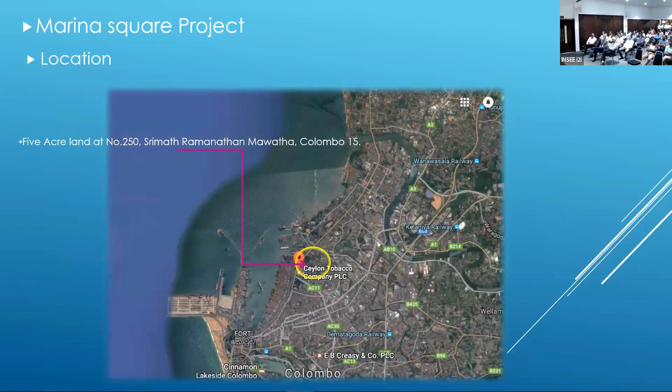1088 luxury apartment units in total, with 1 bedroom, 2 bedroom, 4 bedroom luxury apartment options. 150,000 square feet of commercial spaces, including recreational areas, offices, shops, etc. This is 35-story, 5 building blocks on 5-acre land. You can see the site layout. It's just adjacent to the Ceylon Tobacco Company, nearby the port. This is the close-up of the land. It's like an L block land. You can see the 5-acre land.

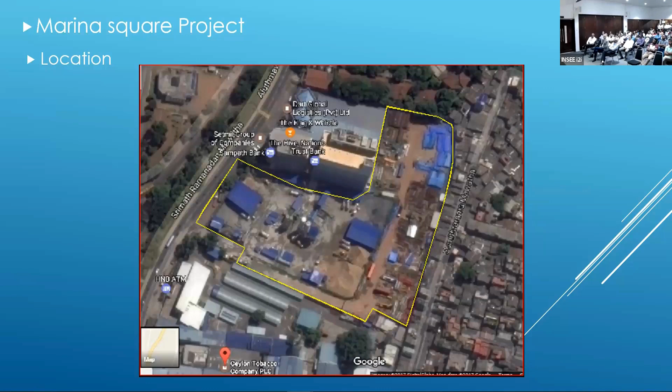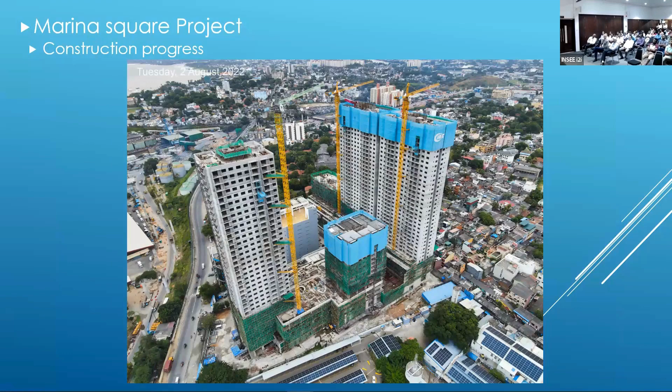This is actually the ongoing construction, the picture in year 2022. And this is 2 months back. Compared to the architectural view, the structure has been completed at this stage. You can see the architectural 3D view is almost equal to the existing structure. You can see on the right-hand side the port elevated road, and also here the port a few 100 meters nearby.

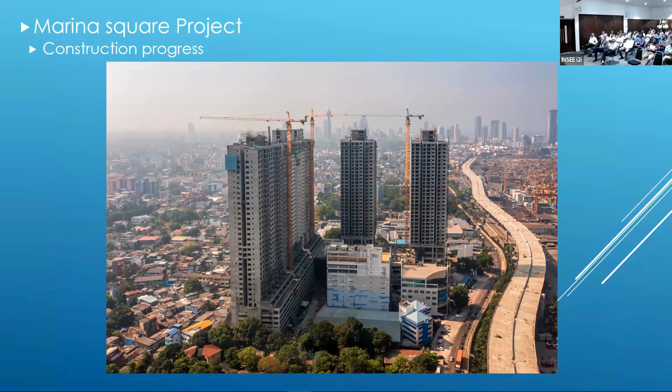So I will move into the challenges phase. When we are considering the challenges of the project, we can divide challenges into 2 parts. One is challenges that have been faced previously, and the other one is challenges new to the project under consideration. In this project, we have faced a lot of challenges, but I have listed out a few of them to give you some understanding of those challenges.

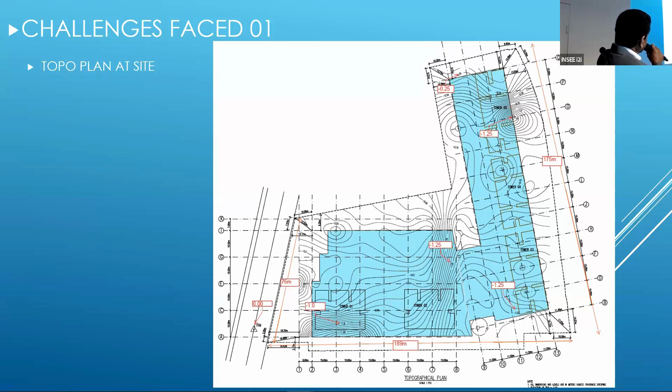First one is the shallow and varying rock depth, because this is 5-acre land. Initially, we observed that the rock depth is very shallow in some areas, very deep in some other areas. So initially, we plotted the topo of land this way. You can see the front road level, if considered 0, the internal ground levels are around 1 meter below the front road line. The length of the site is around 189 meters. Width of the site is 175 meters, as you can see.

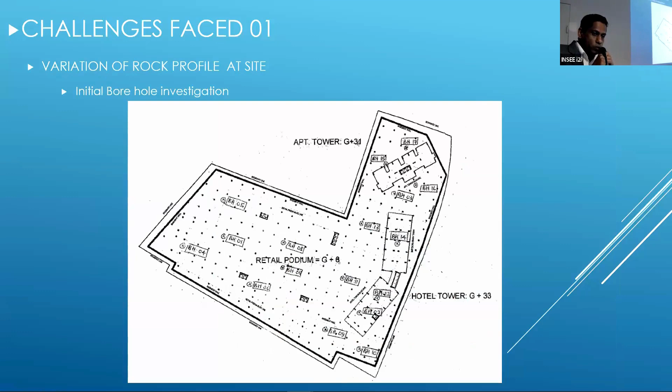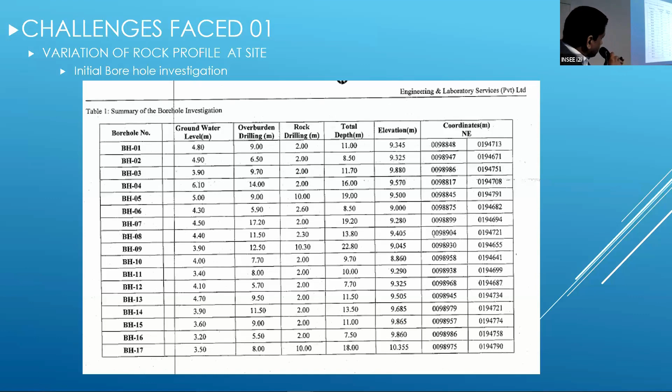So with that detail, we wanted to get more detail of the rock data, the actual rock profile of the site. Because if we did the designs without considering all this information, we would have ended up with a mess at the end of the design, because we wanted to maximize the parking and the basement depth. So therefore, we recorded all data this way, and we obtained all the rock profile data within a 15 meter grid. The whole site we explored on a 15 by 15 meter grid. More than 100 boreholes we performed on this site, in order to get the rock profile of the site, because this is very vital information.

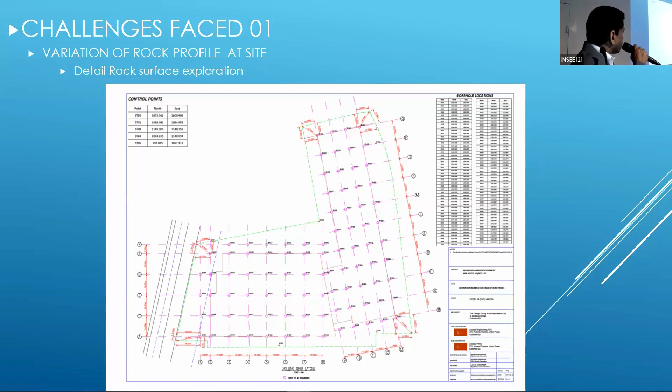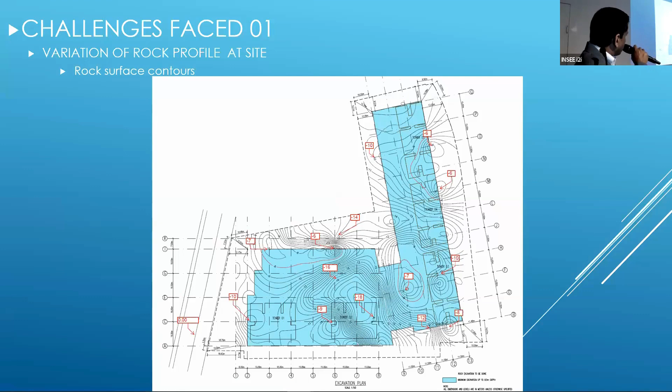Otherwise, if we plan the depth of our basement more than this rock depth, finally it will end up with project issues. So therefore, based on those data, we plotted all the rock profile contours. You can see in front it's around 10 meters, here 7, again 6, and very nearby it's 16 meters. So within 15 meters, we can see a 10 meter difference in the rock. And here also it's 18 and 7 meters. Within just more than 15 meters, we have more than 10 meters rock depth difference.

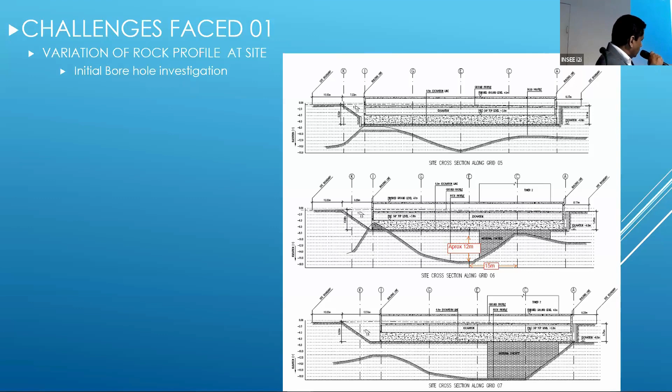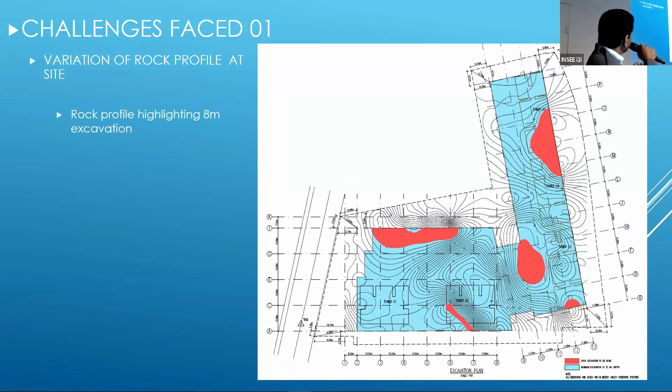So we plotted all this information in the section as well. In the 15 meter distance, we observed approximately a 12 meter difference. The dip angle is 45 degrees, that kind of information we obtained. So therefore, initially we had the idea to go for a deep basement, but if we consider the 8 meter basement with the pile cap depth, the rock excavation would have been done like this red color patch. Another proposal was the 8.5 meter basement depth. If we took that decision, then rock excavation would have been done this way.

If we took this kind of decision, this would lead to a very difficult situation when we go to construction. Without having this information, if we arbitrarily took this decision, we would have ended up with a mess, because in this area the Ceylon Tobacco Company is there, with the set mill and all the other important offices, and in the backside there were a lot of community areas. So therefore, if we plan to do rock excavation, then time, cost, and also environmental issues will come into the picture.

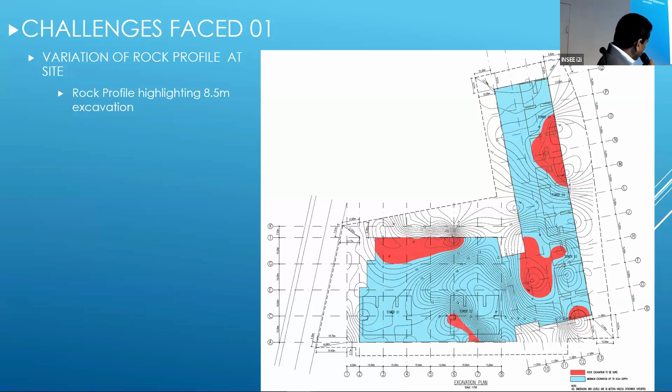So what are the lessons learned here, and what are the decisions we have taken? The information gathered: minimum rock depth in the vicinity is 6 meters, maximum rock depth from the EGL is 18 meters. Basement clear height requirement is 4 meters minimum. The challenges faced because of this situation are issues related to the design, because we can't put our basement as per our requirement, and we need to consider this aspect in our designs. Then rock excavation involvement, and issues related to constructability, vibration, cost, and social issues.

So what are the decisions taken? We suggested a sub-basement, with 2.5 meter excavation from the EGL. Previously I said that the land is around 1 meter below the front road line. Because of this sub-basement, our ground level came up 1.5 meters above the existing ground level, 0.5 meters above the front road line. So this decision was very important, because considering the sewer, the stormwater and all these things, we could manage with this decision.

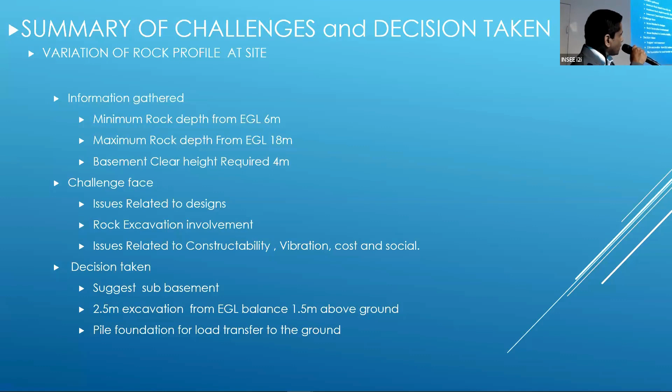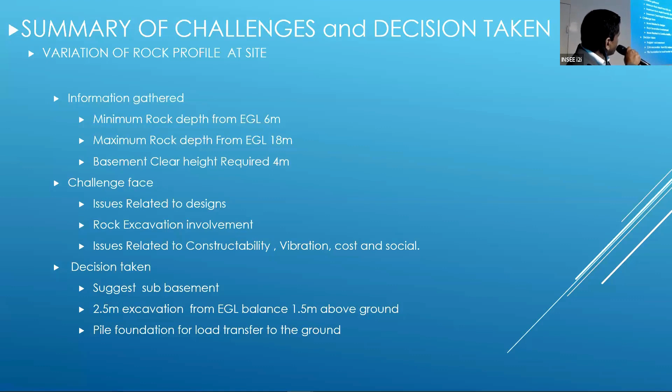In the other area, we need to go for the pile foundation. So therefore, the foundation system is different. In that case, the different behavior of the foundation system, that is also a structural issue, will come into the project. So therefore, with this information and with the challenges faced, this is the decision taken in this issue. So this is the first.

So we'll go to the second challenge faced. In the initial stage, there were two types of architectural design for this building. One is the shear wall structure. The other one is the wall frame structure. I will briefly introduce what are the types of structural form for the high-rise building.

This is what we call rigid frame structure. The column and beam connection with the moment resisting joint is the main structural form in this system. Lateral stiffness by rigid frame action. Generally, when we are talking about the high-rise building, we mainly consider the lateral loads. There is a reason for that, because high-rise and medium-rise buildings we can consider as vertical cantilevers. So the lateral loads are the most important loads which we need to consider in this structural form.

So that's why people are mostly talking about the lateral stability and lateral forces of the high-rise building. The vertical load, anyway, we are designing the elements for the sizing to take care of the vertical load, but for the lateral load, the structure is very vulnerable. So therefore, mainly people are talking about the lateral load when we are considering high-rise and medium-rise buildings. So this is the rigid frame structure, lateral stiffness by rigid frame action.

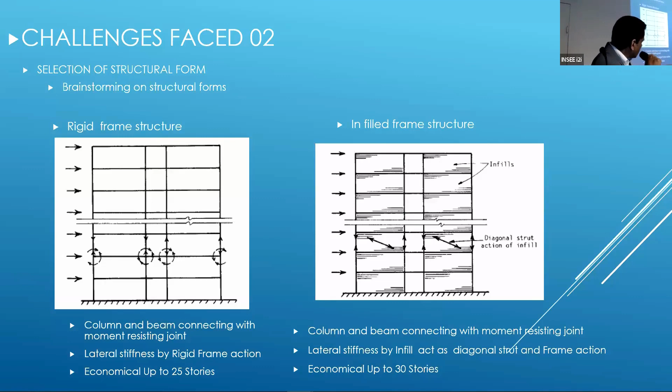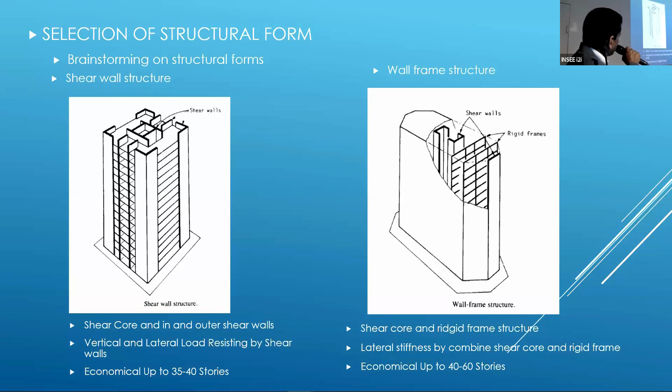This is the wall frame structure. The internal shear walls and the rigid frames are there, the shear core and rigid frame structure. Lateral stiffness by the combined shear core and rigid frame action. This is economical up to 35 to 40 stories. This is 40 to 60 stories.

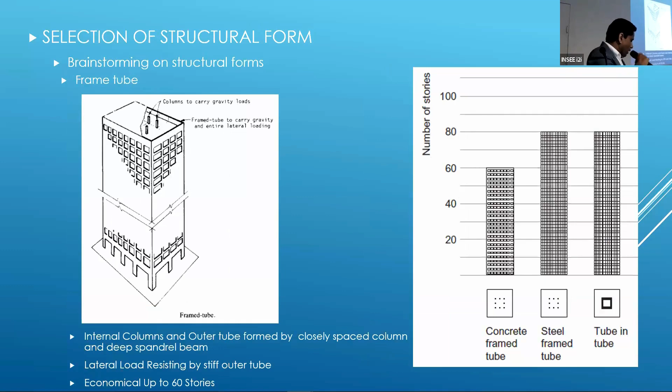So these are some other structural forms, the frame tube structure. You can see with this frame tube structure you can go up to 60 stories, steel frame tube structure 80 stories, and tube in tube structure also you can go for 80 stories. So now I would like to go to the challenges faced and the decisions that we have taken in this case: the structural form.

We have two structural forms given by the architect. One is shear wall structure, and the other one is the wall frame structure. So we selected some criteria to evaluate these two systems. What are the criteria? The structural performance, financial performance, and functional performance. These are the criteria that we have considered to evaluate these two systems.

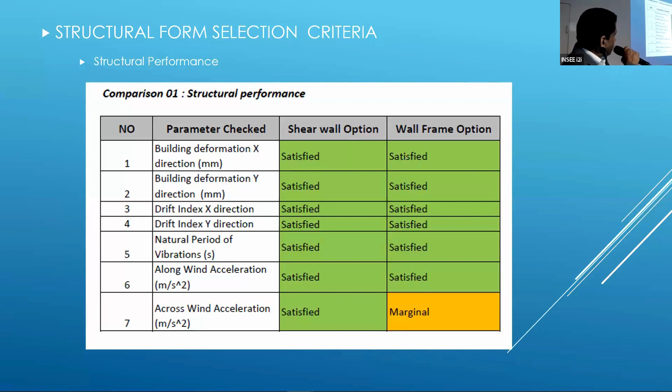In the shear wall option, all these things were satisfied, but in the wall frame option, the crosswind acceleration came to a very marginal point. So we had the opportunity to improve this wall frame option with some modification to the column and the center core. And we also considered the wall frame option as one structural form. So therefore, we evaluated the other aspect as well, functional performance.

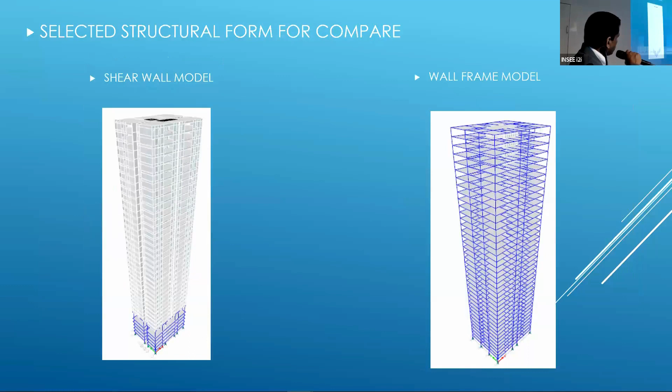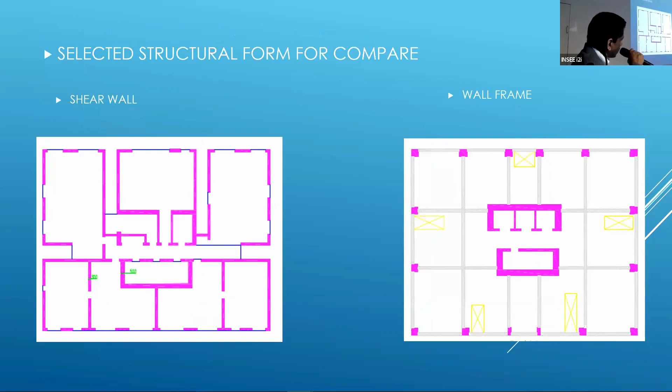What are the parameters checked? Apartment layout flexibility, structural elements visibility and outside view from the inside of the apartment. For apartment layout flexibility, if we consider the wall frame option, I'll go to this wall frame option. We have a big column here, and the set of beams also running here and there. So the apartment layout flexibility is not so good in that option; it's compromised to some extent due to the large column. Here, a flexible layout option is there.

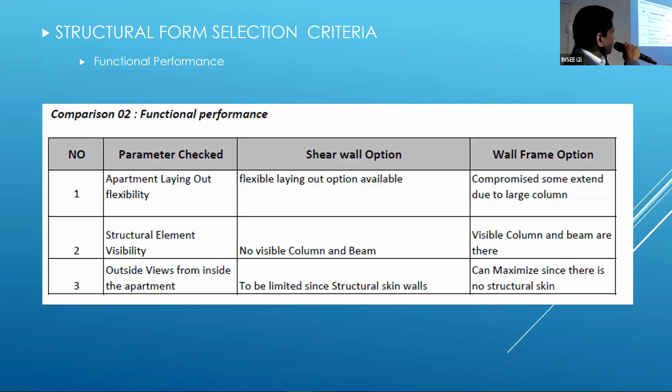Structural element visibility: some visible columns and beams are there. Here, no visible column or beam. And outside view from inside the apartment: because in this shear wall option our outside walls are also load bearing, the lateral load bearing wall system, we can't open those walls as we require, because we need to take some precaution when giving openings for doors and windows. But in this case, it's not an issue. So we can maximize it since there is no structural skin.

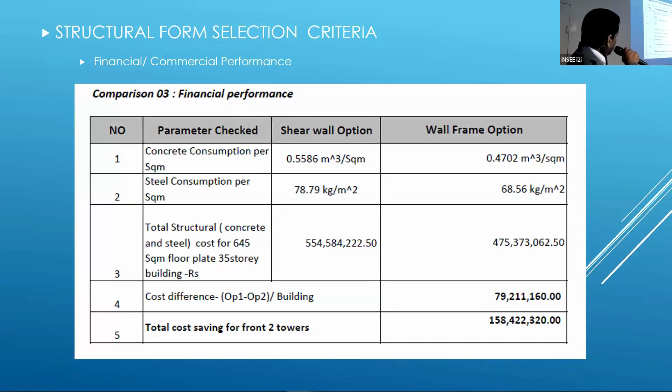Then financial performance. We evaluated the concrete amount that we need to use in these two options. This calculation is actually not applicable to today's context. We did this comparison in 2017 and 2018. This is for two front towers. The structural cost saving for the wall frame option was 158 million. So therefore, we summarize all this information this way.

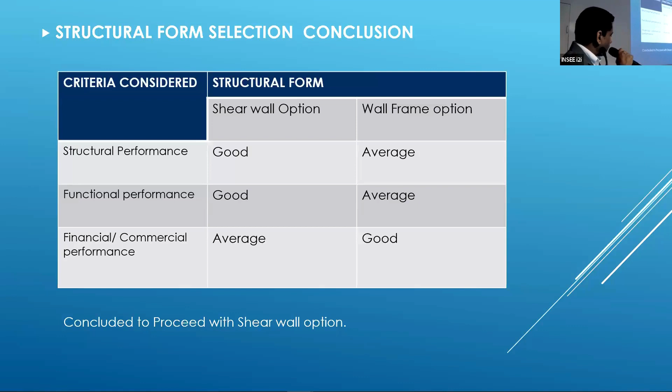The criteria considered are structural performance, functional performance, and financial, commercial performance. Shear wall option, the structural performance is good; the wall frame option is average. Functional performance is good for the shear wall option, but the wall frame option is average. Financial, commercial performance, the shear wall option is average; the wall frame option we need to consider as good, because we have some saving with it. But considering these two good items, we concluded to proceed with the shear wall option in this project. So this is the second challenge we faced, and this is the decision we have taken to move forward.

So next, challenges faced 3. I think Professor Nanayakkara and Dr. Musa will be interested in this aspect, because I have taken some input from Professor Nanayakkara's reports on the challenges faced and the solutions. So what are the challenges faced? Design and construction of the transfer floor, concrete grade selection and minimizing cement content, thermal monitoring, and construction methodology of transfer beams.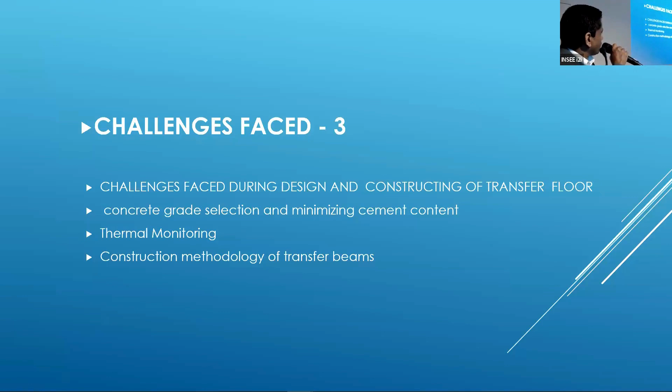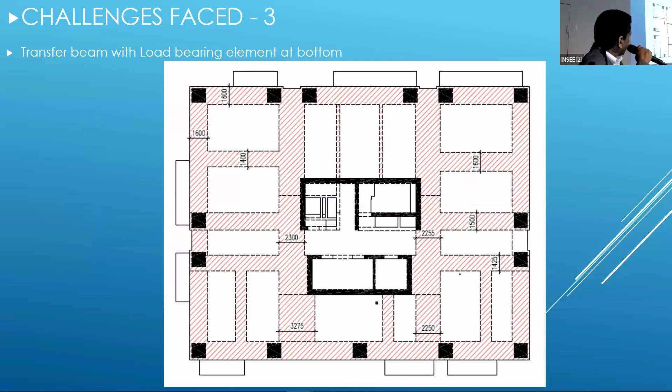So this is the transfer beam layout with the bottom load bearing elements, and this is the transfer beams with the bottom load bearing elements as well as the top shear walls of the tower. This is the typical one tower. The transfer beams that we have considered are 2300 by 3000, 3275 by 2750. Like this, we had a set of transfer beams.

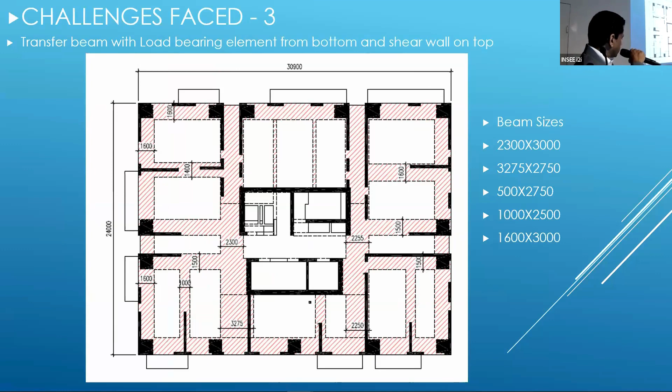So what are the challenges faced and decisions taken? Concrete grade selection and cement content. This is the challenge actually in this transfer beam. Why do we need to reduce the cement? I had a discussion over the last few days with Dr. Musa. His concern was to reduce the paste, because the paste will induce a lot of issues in the concrete. So for the mix design, the design requirement for the transfer beam is grade 50.

Because we were involved with the design and construction consultation of this project, at which level is this concrete grade required? Because we did the analysis of the whole structure, this grade 50 is required for the transfer beam once we construct up to the topmost floor, the penthouse and the water tank, machine room and all these things, and after application of the whole dead load, live load, superimposed dead load and all these loads. Only then do we need this grade 50 concrete for the transfer beam.

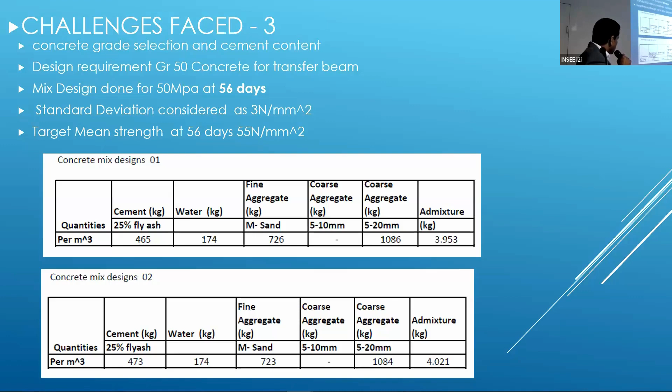Generally what we consider is 28 days strength, but we have taken 50 at 56 days because initially what we need is 35, 40 grade is enough. With this, we were able to reduce some amount of cement content of our mix design. In the INSEE mix design at the i2i center, they gave us a standard deviation of 3 with a very good quality controlling system, and the target mean strength at 56 days considered is 55. So we considered two mix designs like this, with 25% fly ash, 465 cement content and 473 cement content.

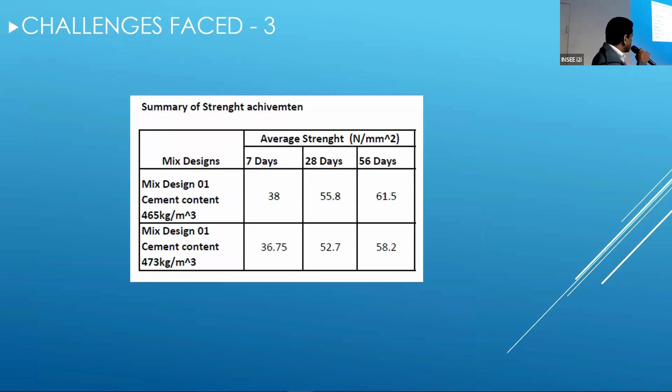What is the strength gain? Mix design 1, at 28 days we obtained 55, and at 56 days we obtained 61. So you can see around 5 to 6 Newton per millimeter square strength gain from 28 to 56 days. So we consider this also as a rational decision to reduce the cement content.

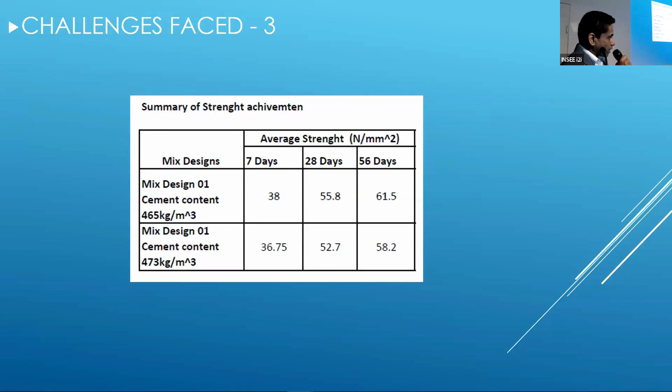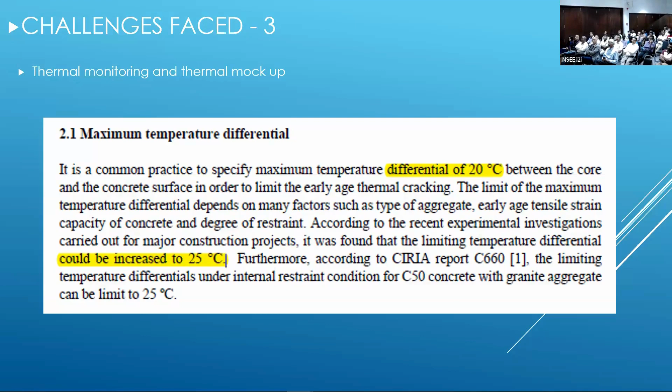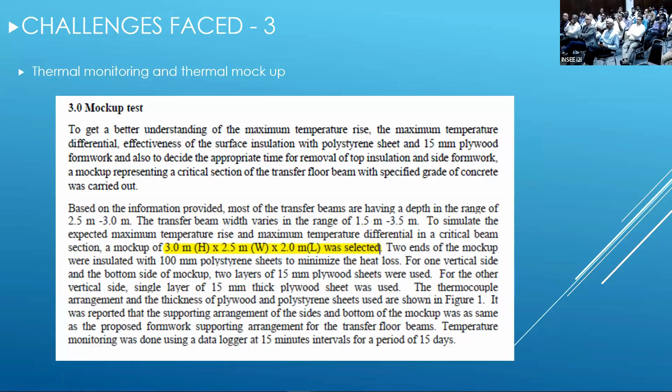So this is one decision that we have taken, and this is actually an extraction from Professor Nanayakkara's recommendation regarding the thermal mock-up, because we performed thermal mock-ups for these two mix designs. We performed two mock-ups, one a computer simulation mock-up, the other a physical mock-up. With this mix design, the differential core to side surface temperature difference, which generally we consider as 20 degrees, could be increased to 25 degrees, and the core temperature could be increased to 75 degrees. So with that, the professor recommended doing a 3 by 2.5 by 2 meter mock-up.

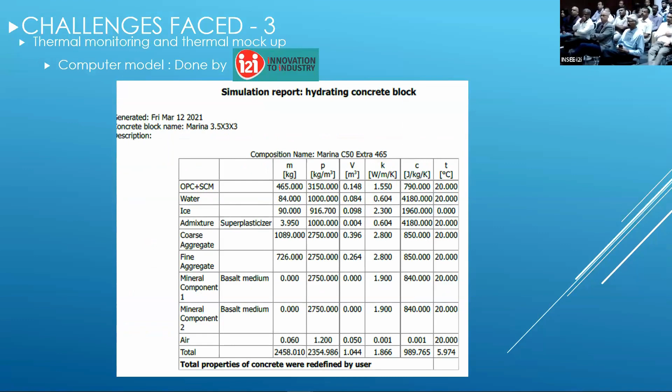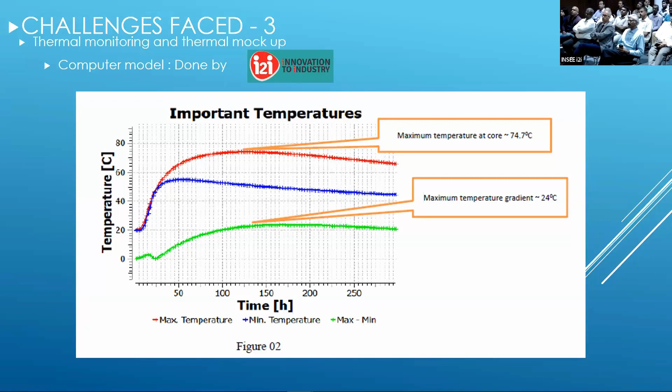This is the mock-up thermo gauge layout. This is the computer simulation done by the i2i Innovation to Industry Center. In this, they considered an initial temperature of 20 degrees. Their observation was the maximum core temperature is 74.7 and the temperature gradient is 24 degrees. With that information, we performed the physical mock-up also.

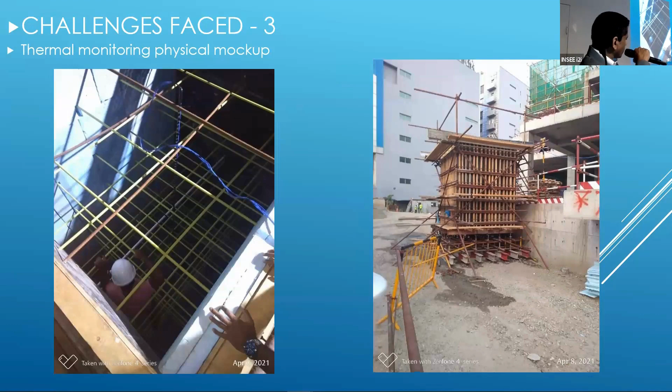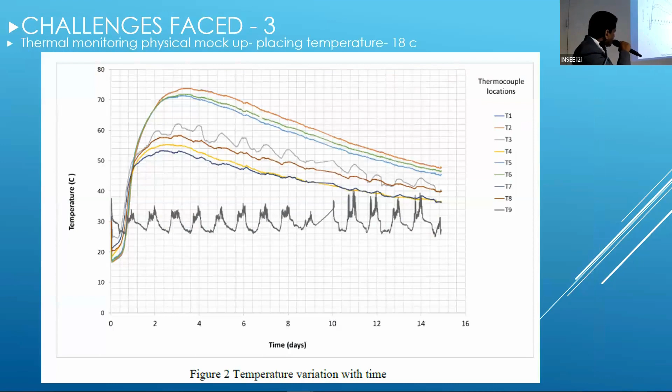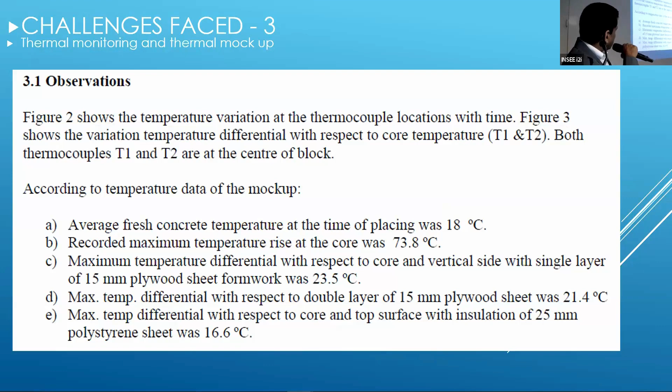This is the physical mock-up that we considered. You can see some pictures of this physical mock-up. What we did is reduce the initial pouring temperature to 18 degrees, and the observed core temperature rose to 73.8 and the temperature gradient is 23.5. So this is our observation, and this is the recommendation we obtained with Professor Nanayakkara's help.

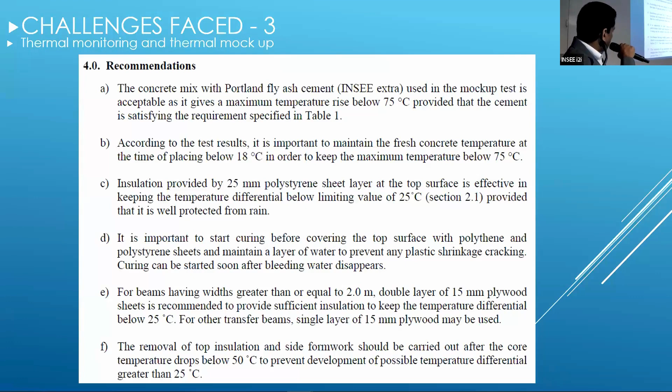The concrete mix design with Portland fly ash cement used in the mock-up is acceptable to give the maximum temperature rise and the temperature difference below 25 degrees, and all the parameters are within our limits, and we performed our construction accordingly. These are some pictures of the transfer beams.

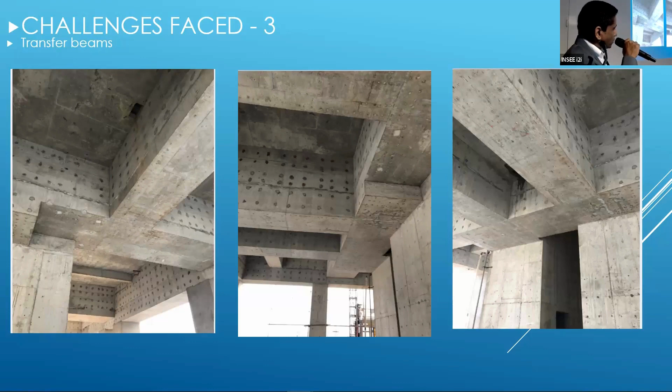You can see, although we considered a 3-meter depth in the mock-up, we constructed the first 1-meter depth first because of loading issues at the lower level, because we had to do the repropping arrangement below, since this is at the 5th level of the structure, and we had to face repropping issues. So first we constructed the 1-meter depth, and the subsequent part of around 2.5 meters next.

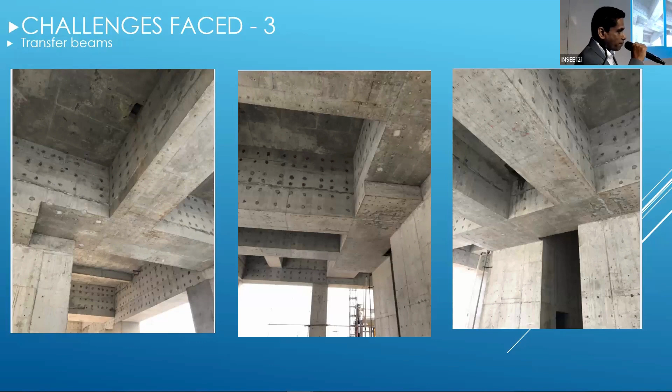So here, what are the challenges and what are the lessons learned? Controlling of temperature, and construction of a large transfer beam at the upper level. What decisions were taken? Optimum concrete needs to be selected for transfer elements such as pile caps and transfer beams.

When we are doing the designs, every time we need to think about the optimum concrete grade, because if we arbitrarily increase the concrete grade, it will not help the structure; we are just transferring the issue to the site. We can do all the alternate designs at the office stage, with reanalysis and all these things, and transfer the minimum amount of issues to the site.

We know that the grade of concrete will not largely affect the bending capacity of the structure, because increasing the grade of concrete has only a marginal effect on bending capacity, but it does actually affect the punching and flexural shear.

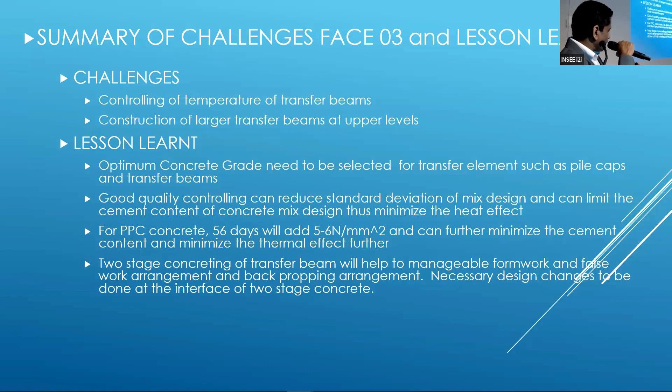So, moving on to challenges phase 3 and 4.

BIM integration. In this kind of large project, BIM integration should be implemented. What is the requirement of BIM integration? To have an integrated design approach between all disciplines, especially MEP coordination and architectural-structural design.

What are the advantages of it? Clash identification, minimizing rework, enhanced visualization, and cost and time saving. So I'll just show you.

BIM platforms that we can use commercially. Generally, Autodesk Revit is the most used BIM platform, and this is Navisworks, a free version of Autodesk to see the 3D view of the MEP and structure. Tekla Structure is also there, which is specialized for the structural aspect.

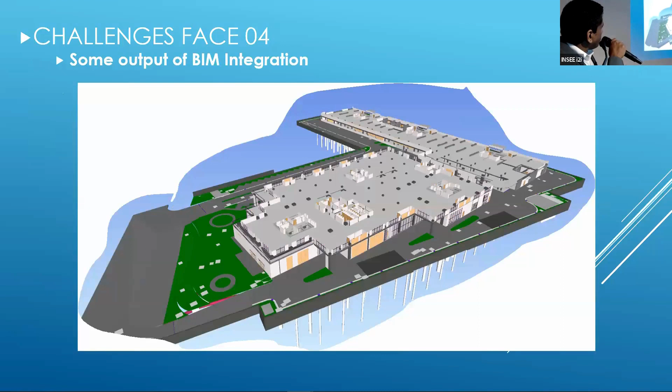So this is our BIM integration and the output that we have taken from the BIM model. You can see all the ducts, sewers, and all the lines integrated with the structure, and we can get all the structural punching as well as electrical and other aspects considered in this.

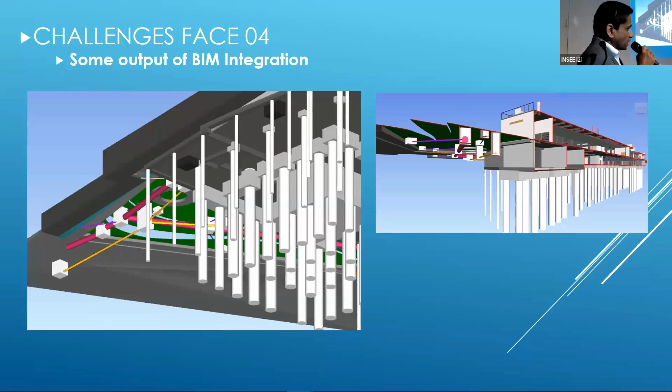In this, we can move the space from here to there in the Navisworks file, and we can see all the MEP and other systems and how they work. So we can move this space around and get 3D visualization of the structure.

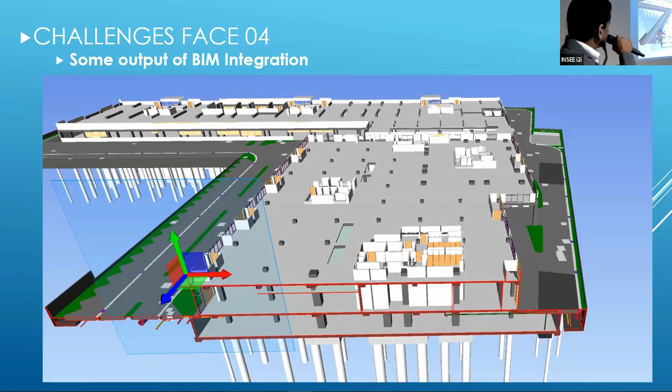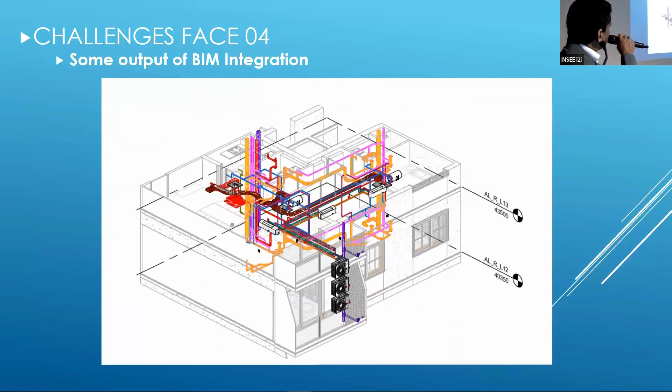So these are a few outputs of BIM integration. You can see the ventilation ducting, electrical, and all items included.

Some pictures - these are a few ongoing captures of the project. This project is almost in the finishing stage now. These are a few ongoing captures.

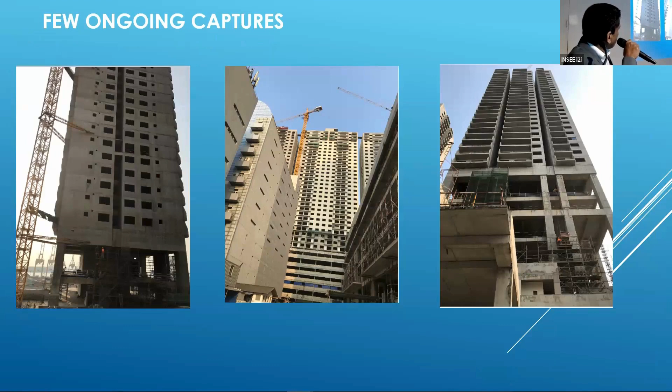So now, I think I have completed most of the challenges phase section related to this project, and now I would like to move on to the novel method of structural monitoring system.

What we have done in the recent past - this is actually fiber optic monitoring of the structure.

In this novel method, we have divided this into two parts. One is the laboratory evaluation and laboratory calibration of the instrument and the fiber optic cable. The second is the actual application of this method to the actual structure.

So what is fiber optic monitoring of the structure? Monitoring of the structural health by using fiber optic cable, inserting it inside or outside of the structure, is identified as fiber optic monitoring of the structure. This is some kind of inserting a nerve system and brain system into the structure.

Once we insert this fiber optic cable system into the structure, we can monitor all the responses of the structural elements - their behavior, stresses, strain, and all these parameters.

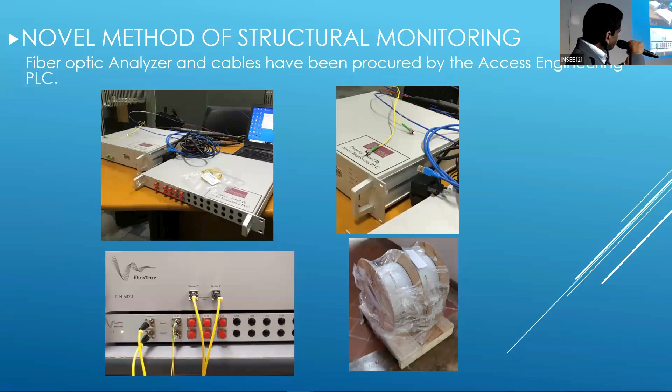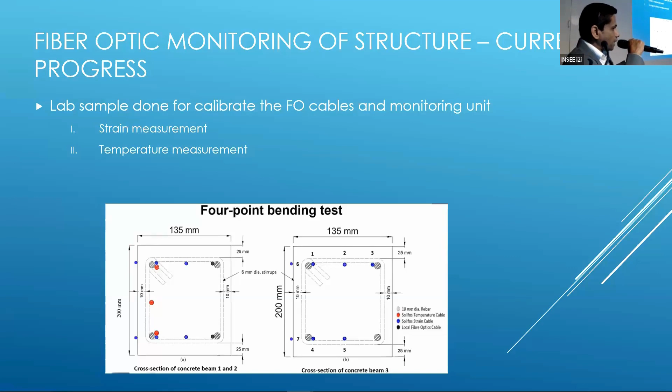So this is the lab sample done to calibrate the fiber optic cable, because we can't directly use this system without calibration. So we used temperature gauges with the fiber optic temperature cable to calibrate it, and strain gauges with the fiber optic strain cable to calibrate the machine.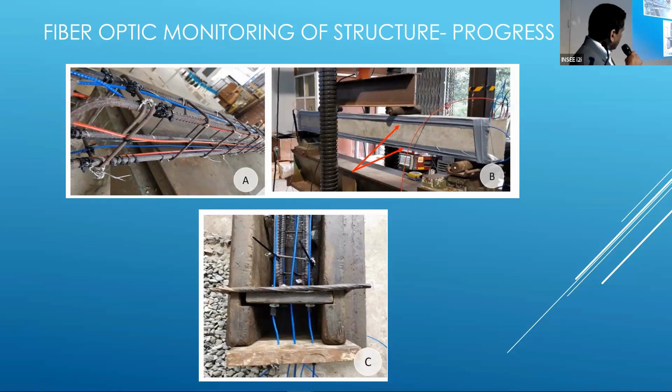So these are the samples that we have done at the University of Moratuwa laboratory. You can see the red color is the thermal fiber optic cable to measure temperature, and the blue one is the strain measurement fiber optic cable. You can see the samples like this.

What are the outcomes of the testing? Strain measurement as per the strain gauges and the fiber optic cable readings are exactly tallying, including outside strain gauge readings. This is a very important point, because in the completed structure we can only insert from the outside. So outside strain gauge readings and outside fiber optic cable readings gave the same results.

If we have a compression element, we need to apply small pre-tension to the fiber optic cable to get the correct answer. This is the second finding. Temperature measurement obtained exactly tallies with the temperature gauge measurement. So this is the third observation.

For real-time monitoring, we are now planning to monitor the pile foundation, axial shortening, and the structural response of heavily loaded columns. The importance of this is that when doing pile foundation testing, generally we do it at the initial stage. Once we insert this kind of fiber optic cable, we can monitor and get results even after construction completion of the superstructure.

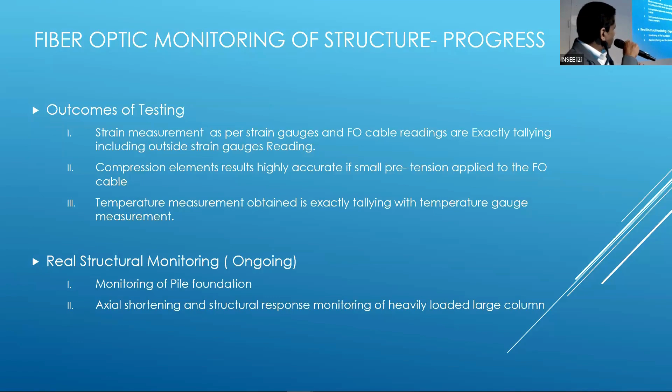So we can get the deformation, stresses, and strain undergoing in the pile foundation, because previously we couldn't get this kind of information. Once the superstructure construction is done, that's it - we don't know what happens to the pile foundation after that. So now we can get more information after construction of the superstructure. This is our achievement in this fiber optic monitoring.

Dr. Kasun Kariyawasam and Professor Malik Ranasinghe published this in the Engineer UK, and Engineer UK selected this as the winner of the 2023 Information and Data Connectivity sector. So that's our achievement.

So these are the benefits that I have mentioned here. Another benefit is that we can monitor geotechnical vulnerable areas and develop an early warning system, because a few months back we had a lot of rain in this country, in the whole area, and we observed a lot of geotechnical failures, retaining wall failures, and slide failures. So this system we can use as an early warning system for these failures.

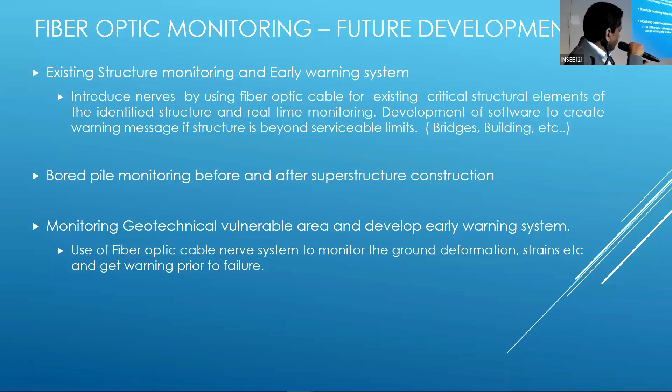So I would like to conclude my presentation with the following items. First item is the rock profile observation. Detailed testing of the subsurface rock profile gave vital information so that the design could be altered to be most constructible, considering the environment, time and cost. This is one aspect we considered in this Marina Square design.

Second, we evaluated the structural form of the proposed towers and selected the most suitable one considering aesthetic, structural and functional performance, and also the cost.

Evaluated most suitable concrete mix designs for transfer beams with better thermal performance, and two-stage construction of transfer beams to minimize the loading impact below levels and backpropping arrangement. Integration of BIM for clash detection minimizes subsequent modifications and ensures smooth coordination. Finally, a novel method of structural monitoring system enhances knowledge about the behavior of the structure. These are the conclusions of my presentation today.

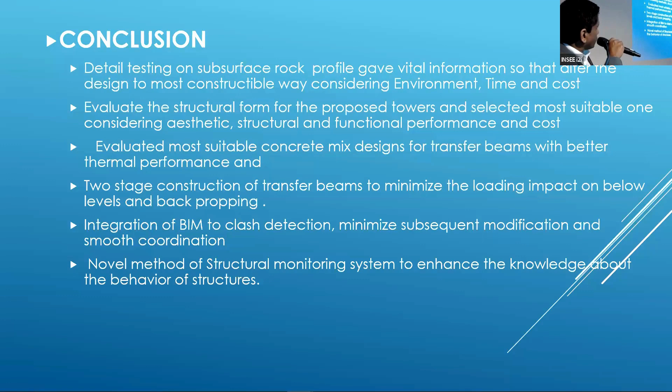I would like to acknowledge my design team. During the introduction, they introduced me. I have done a lot of projects under my name, but without this team, I can't do anything, so the team is most important. I would like to acknowledge my team as well as the Harbour Village Private Limited team, who gave a lot of support to finalize and successfully complete this project. KTP Consultant for the structural consultation, a member of Surbana Jurong group. DG5 and Heterogen for the architectural works and BIM integration. China Harbour Engineering for the construction part. Professor Nanayakkara and Professor Malik Ranasinghe of University of Moratuwa, I would like to acknowledge their support given to this project. And last but not least, INSEE Limited and Innovation to Industry (I2i) Center gave big support in giving me the opportunity and the thermal monitoring support and all these things. I would like to acknowledge all this, and thank you very much for your patience during this presentation.